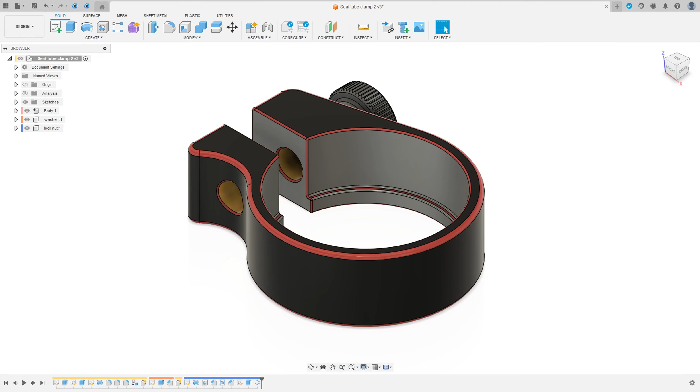Let me hide all this component here. Go to assembly, select new component. We call this nylon gasket.

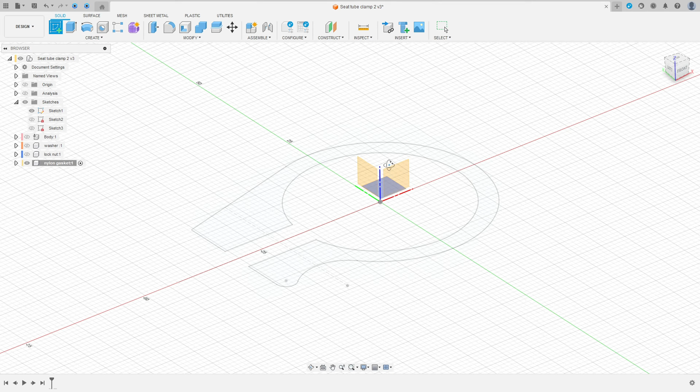Press OK. In the sketch here, show sketch one and go to create a sketch, select the top plane. Now go to create, select project, include project, select this point here, this arc and these two points, and press OK. We have this. We can hide sketch one.

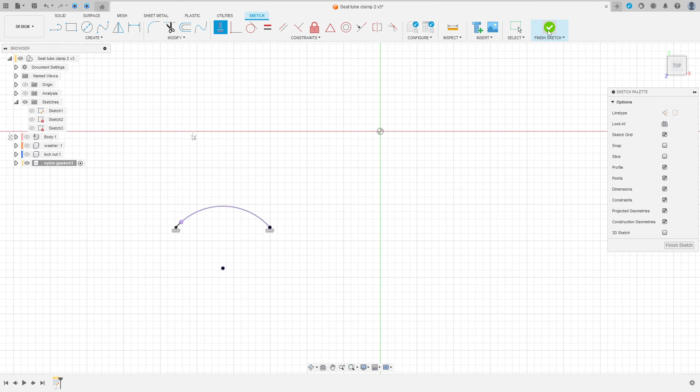We have this. Now go to create, select arc, center point arc, click here in this point and this point here, make an arc here. Now go to constraint, select horizontal vertical, click in this point and this point, and finish the sketch. We have this.

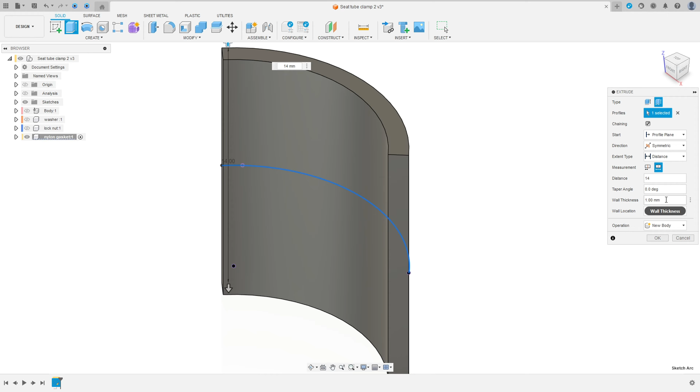Now go to extrude, select thin extrude type, select this profile here, direction symmetric, measurement whole length, distance 14 millimeters. Wall location side 1, wall thickness 1 millimeter. Operation new body, press OK.

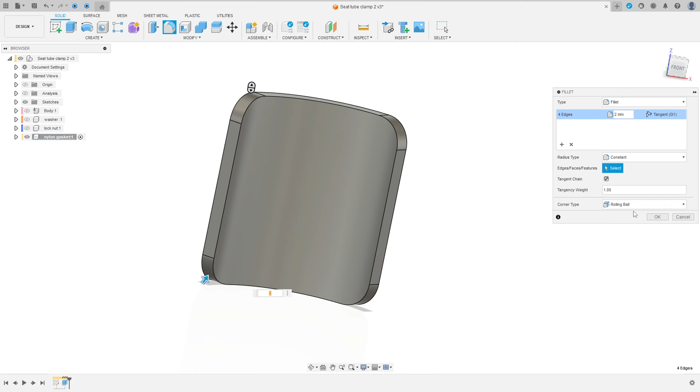We have this. Now go to fillet, select this edge here and this edge. The fillet here is 2 millimeters. We'll make this. Press OK. We have this.

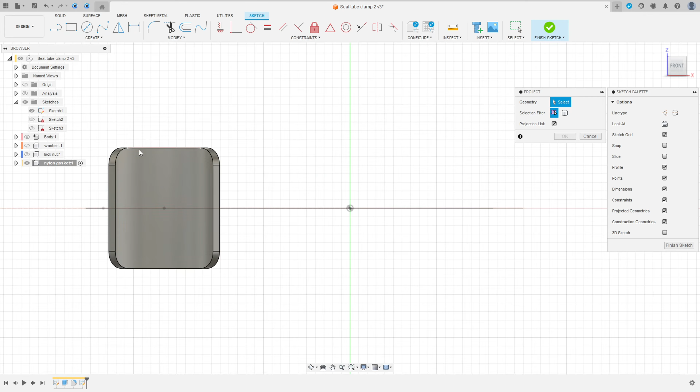Now show sketch one again. Go to create a sketch, select the front plane. Go to create, select project, include project, select this point here, and press OK.

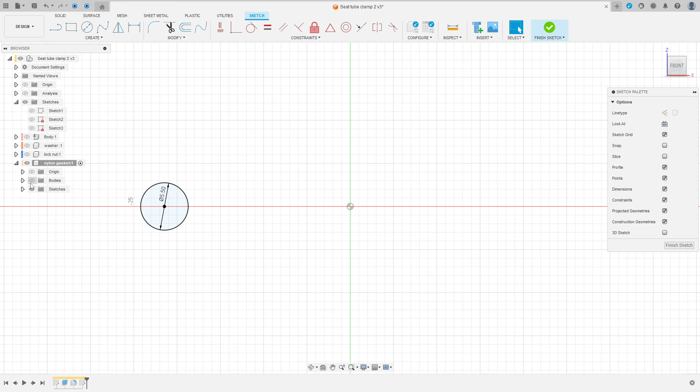Now we can hide sketch one and hide this body here. Select the circle, click here, make a circle with 5.5 millimeters of diameter and press OK. Finish the sketch. Go to extrude.

The operation here will be cut. Make a cut here to this side and press OK. We have this. Now to finish this part, select fillet.

Select this face here and this face here. The fillet here is 0.1 millimeters. Press OK. We have this.

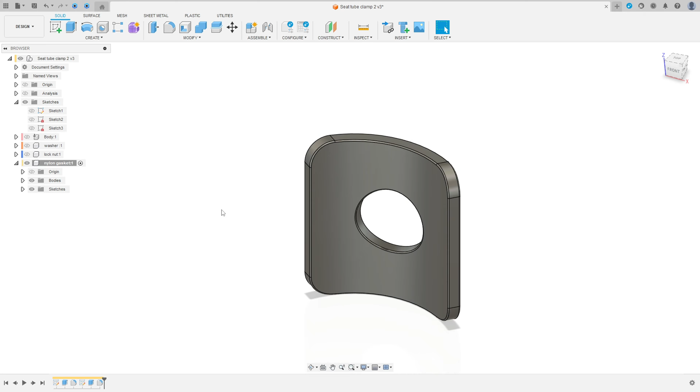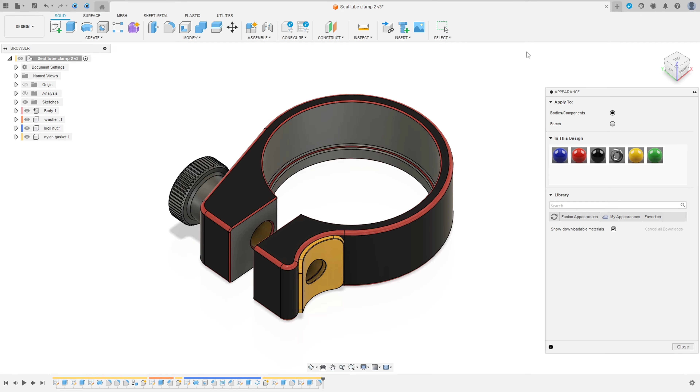Let me show the other component here. Let me activate this. We have this. Let me add a color here. Press letter A on the keyboard. We make this. That's good.

Now go to assembly, select new component. We call this aluminum wrench. Press OK. Let me hide this component here.

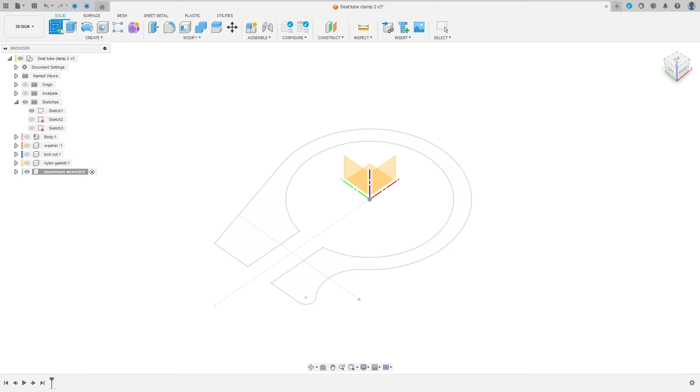First, show sketch one here. Go to create a sketch, select the top plane. Go to create, select project, include project, select this point here and this line, and press OK.

Now select line, construction line. Make a construction line here. This line must be perpendicular to this line and coincident with this point here. So go to coincident, select this point, this line.

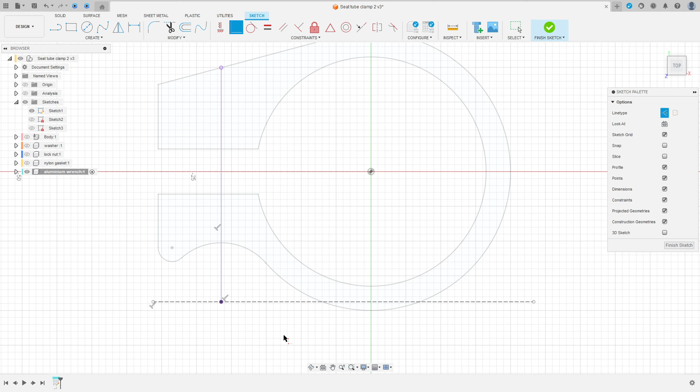Now select circle, click here in this point, make a circle here. Remove the construction line type here. This circle has 15 millimeters of diameter. And make another circle here with 2 millimeters of diameter.

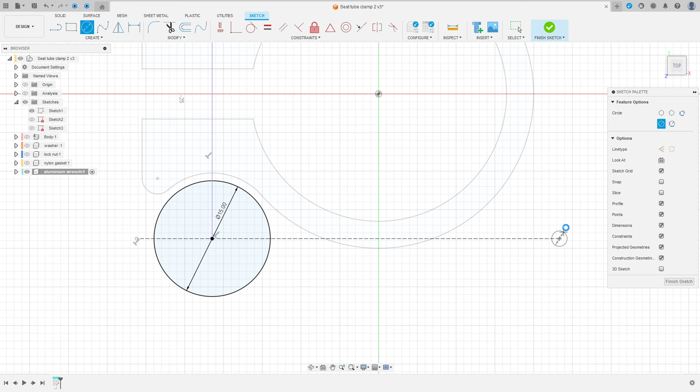Go to sketch dimension. The distance between these two circles here is 63 millimeters. You can move this a little bit here. We have this.

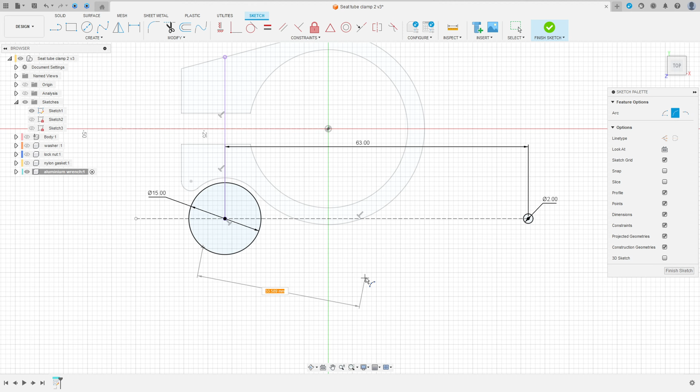Now go to create, select arc, 3-point arc. Click here and this point here, make an arc here, and create another arc here, and create another arc here. This arc must be tangent with both arcs here.

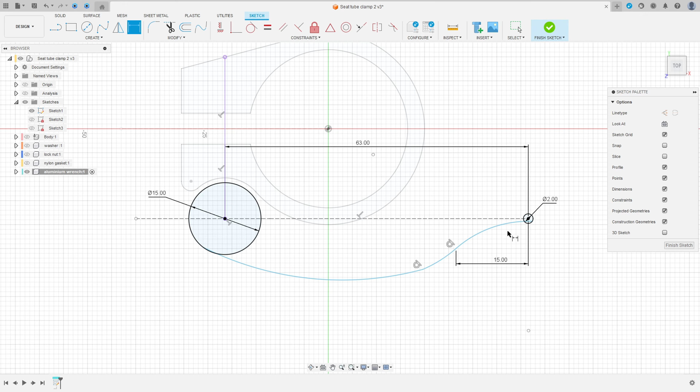Go to sketch dimension. The distance between this point here and the center of this circle is 15 millimeters. Go to constraint, select tangent, make this line tangent with this circle.

Now the distance of this point here, go to sketch dimension. The distance between this point here and this construction line is 4.7 millimeters. And the distance between this point here and this construction line is 8.5 millimeters. We have this.

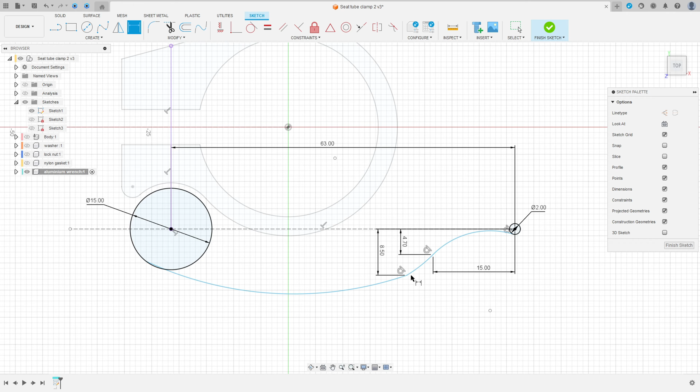Go to sketch dimension again. The distance between this point here and this point here is 42 millimeters. That's great.

Go to constraints, select this arc here and this circle, make this tangent. Now select line, construction line, select this point here and this point here. The angle between these two lines is 23.6 degrees.

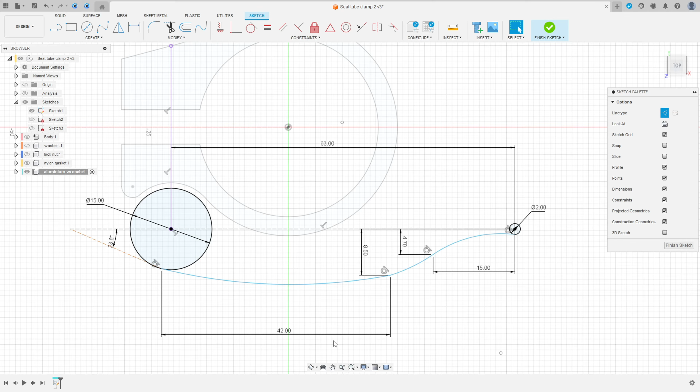Sorry, the distance here, let me delete this. Go to sketch dimension. The distance between this point here and this point here is 15 millimeters.

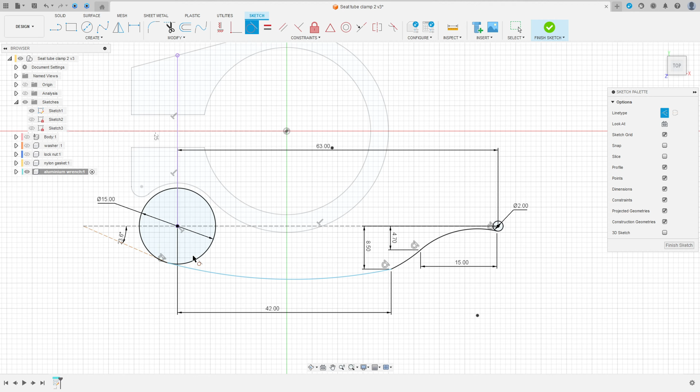And here, delete this distance here. Go to sketch dimension. The distance between the center here and this point here is 42 millimeters. And here, go to constraint, select tangent, make this arc tangent with this line here. We have this. That's good.

We can hide sketch one here. Let me remove this here. Now go to create, select arc, 3-point arc.

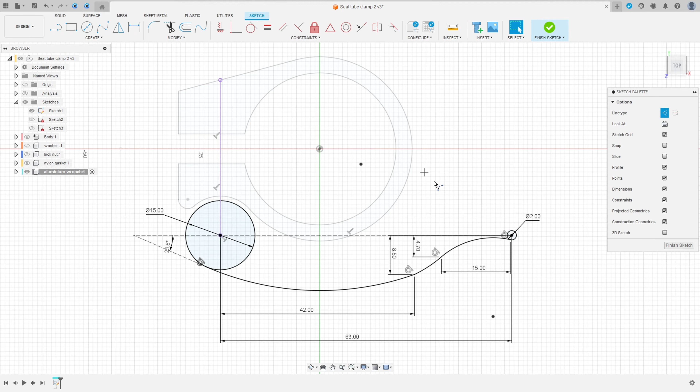Click here in this point and this circle here. Make an arc here. Remove the construction line type and create another arc here. And create another arc here.

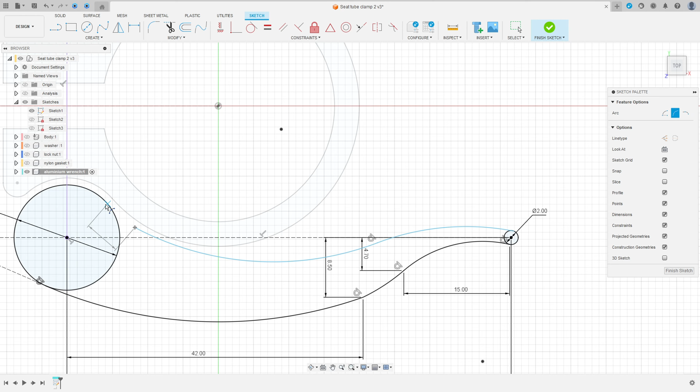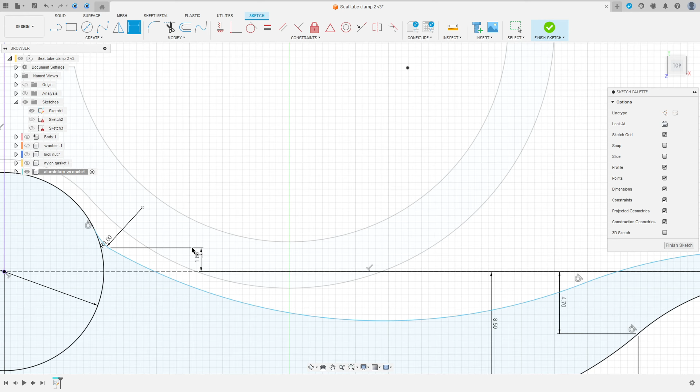Go to sketch dimension. This arc has 4 millimeters of radius. The distance between this line here, this point here, and this construction line is 1.8 millimeters. This arc here has 16 millimeters of radius.

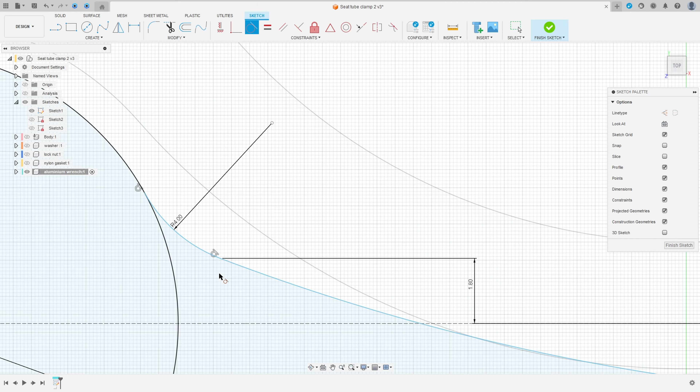Go to constraint, select tangent, make this line tangent with this circle here. And here, make this arc tangent with this arc here. We have this. And here, finish the sketch.

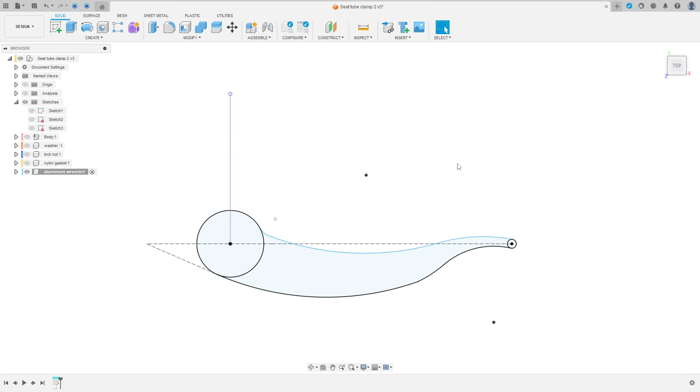Go to extrude, select this profile here. The direction is symmetric, measurement whole length, and the distance here is 14 millimeters. Press OK. We have this.

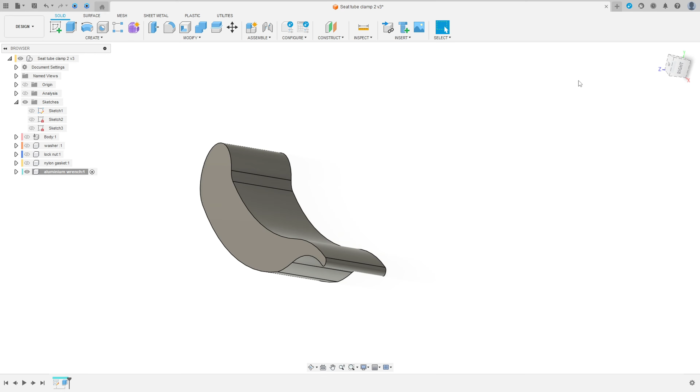Now go to create a sketch again, select the top plane. Show sketch one. Go to create project, include project. Select this line here and select this point. Press OK.

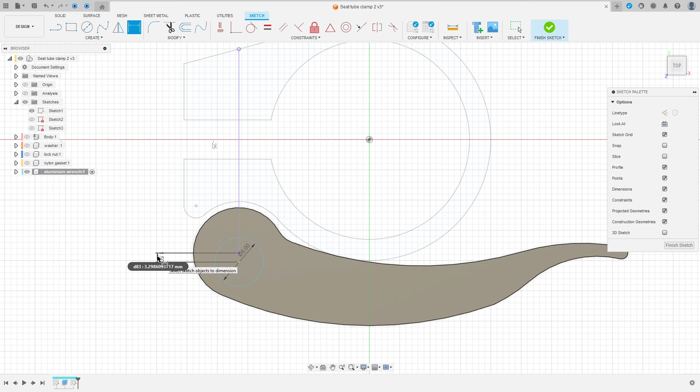Now select this circle. Make a circle here with 8 millimeters of diameter. Go to sketch dimension. The distance between this circle and the midpoint here is 1.5 millimeter. And go to constraint, select horizontal vertical, click in this point and this point here. We have this.

Now go to create, select the project, include project, select this arc here, this arc, and select this arc here and this arc, press OK.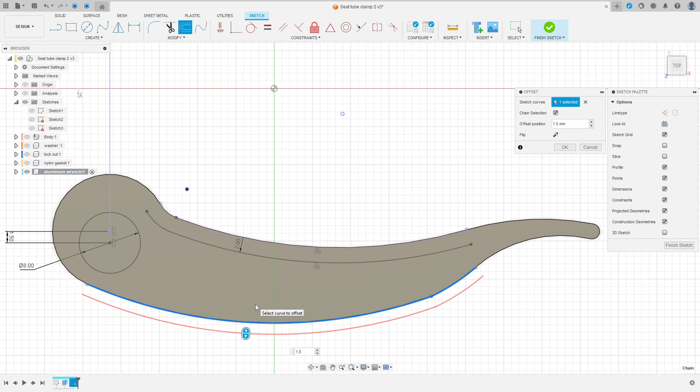Go to offset, select this line here. The offset here is 2 millimeters. And go to offset again, select this edge here. The offset here is 1.5 millimeters. Let's change the side, press OK.

We have this, OK. Select line, click here, make a line here between these 2 points here. Go to sketch dimension, the angle between these 2 lines here is 15 degrees. And the distance between this line here and the midpoint here is 10 millimeters.

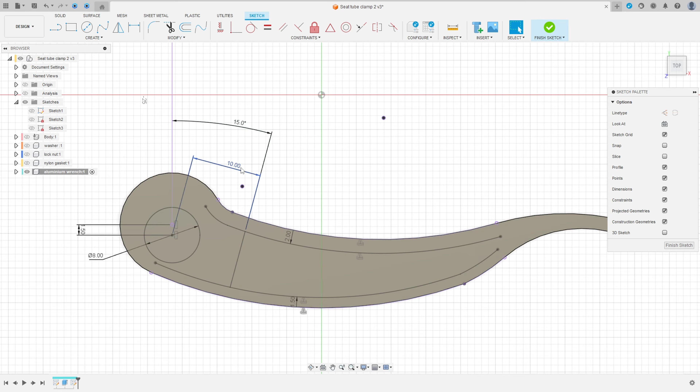The distance here, okay. We have this. Go to create, select arc, 3-point arc, click here in this point, make an arc here. Tangent with this line here.

Go to trim, cut here, and cut here. Go to constraint, select tangent, make this arc tangent with this line. Move this.

He changed the reference, lost the reference, but no problem. What you're gonna do is sketch dimension, select this arc, this point here, 2 millimeters, and this arc, this point here, 1.5 millimeters.

Go to constraint, select horizontal vertical, click here in this point and click in this point here. Okay, we have this.

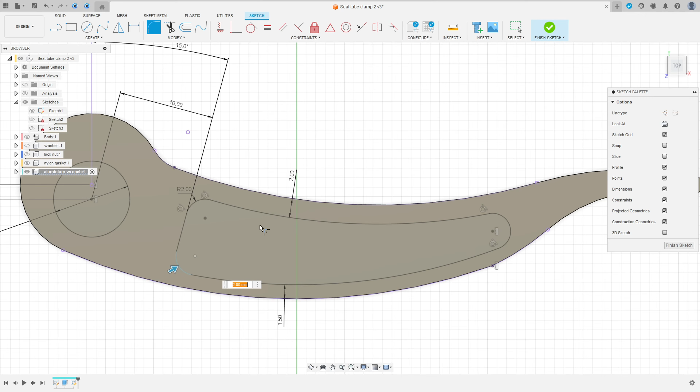Go to modify, select trim, cut here, and cut here. Go to fillet, select this point here, the fillet 2 millimeters, and this fillet here 2 millimeters. Press OK. We have this, okay.

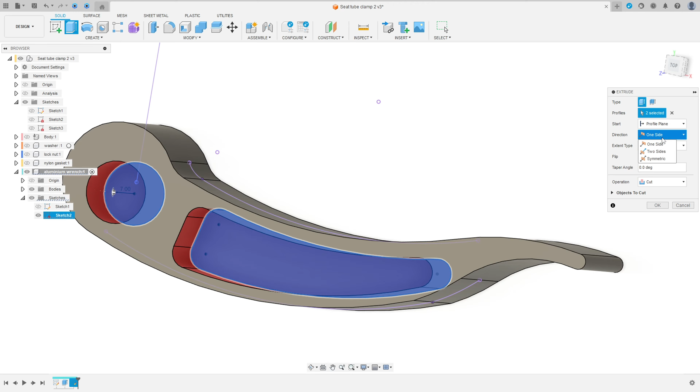Now go to finish sketch, go to extrude, select this profile. Let me hide this body here. Okay. The operation here is cut the extent type, all symmetric, and press OK. We made this, okay.

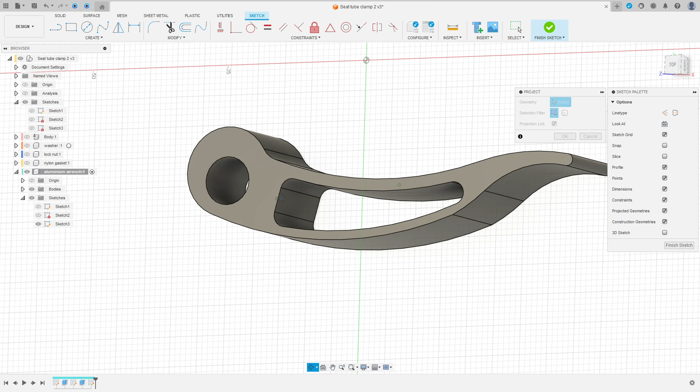Now go to create a sketch, select the top plane, go to create, select the project, include project, select this face here, press OK.

Now select a line, make a line here. Let me delete this. Go to constraint, select parallel, select this line here and this line, okay.

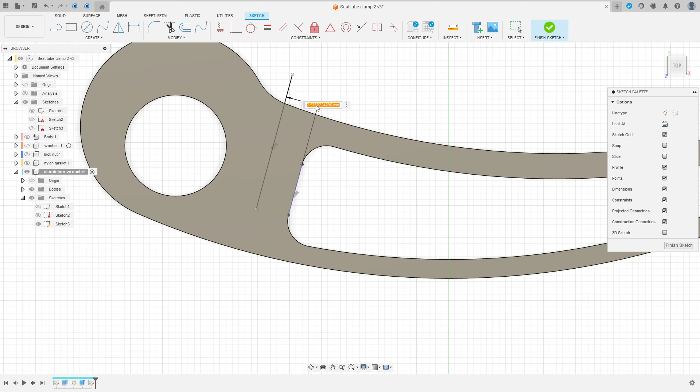Dimension, 3 millimeters of distance. Okay, we have this. We can drag this a little bit.

Go to smart dimension here, 20 millimeters. But we can be 30 millimeters, okay? No problem. That's okay. Now make a

square here because we use this to make a cut here, okay? So no problem. You can put the dimensions here. Finish the sketch.

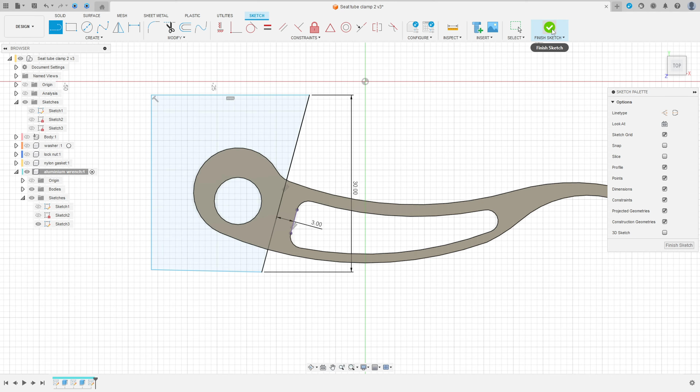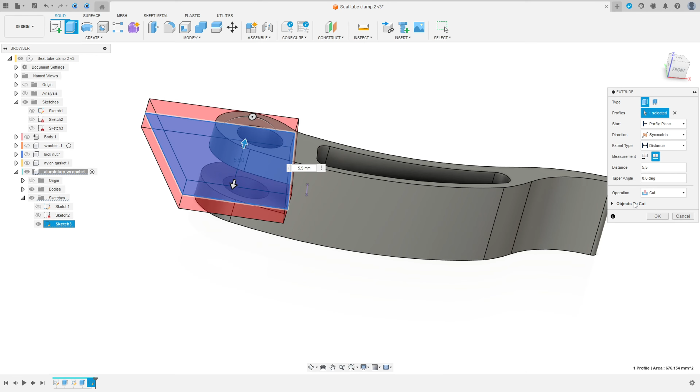Go to extrude, select this profile here. The operation here will be cut. The direction here is symmetric, extent type, distance, measurement, whole length, and the distance here is 5.5 millimeters. Operation cut, press OK. We made this, okay.

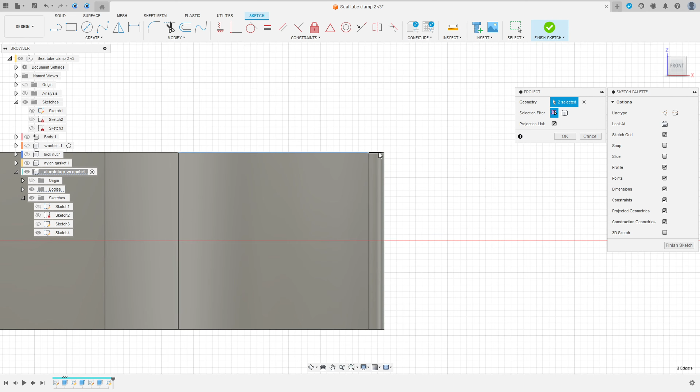Now go to create a sketch and select the front plane. That's okay. Go to create, select the project, include project, select this edge here and this edge here. Select this edge here and this edge here.

And press OK. We can hide this body here. We have this two line here, okay?

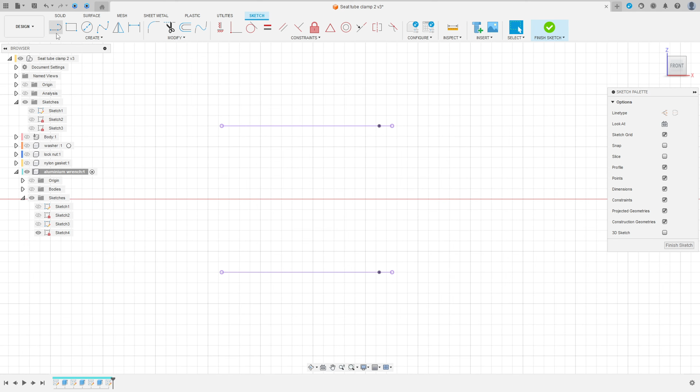Now select the line, make a line here between these 2 points and go to create, select the arc, 3-point arc, click here in this line, make an arc here and make another arc here, okay?

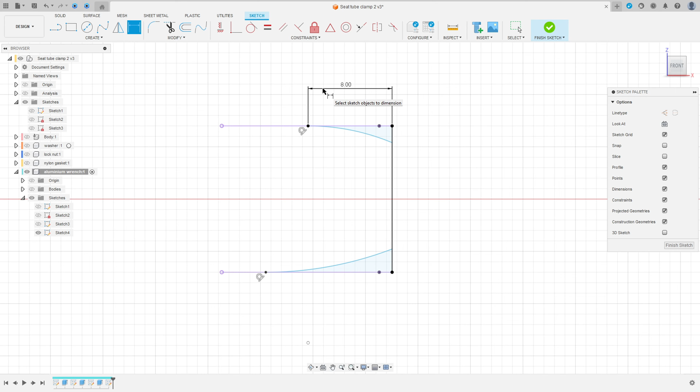Okay, go to sketch dimension. The distance between this point here and this point here is 8 millimeters. And the radius here is 15 millimeters of radius.

Make the same here, 15 millimeters of radius. And the distance here, 8 millimeters. Okay, we have this. Now finish the sketch, show the body here.

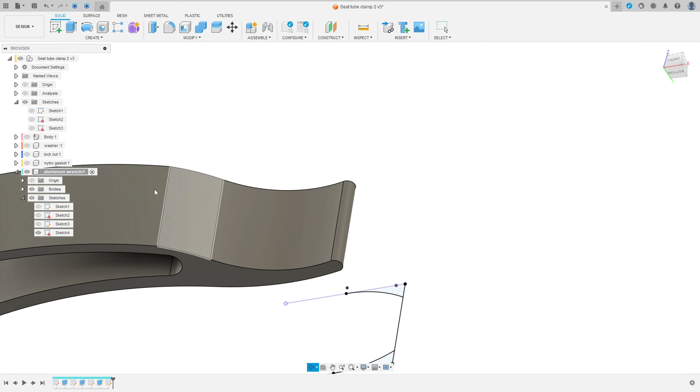Go to extrude, select this two profile here. And we'll make a cut here, okay? So here the distance to object, select this object here, adjacent face, operation cut, press OK. We have this, okay.

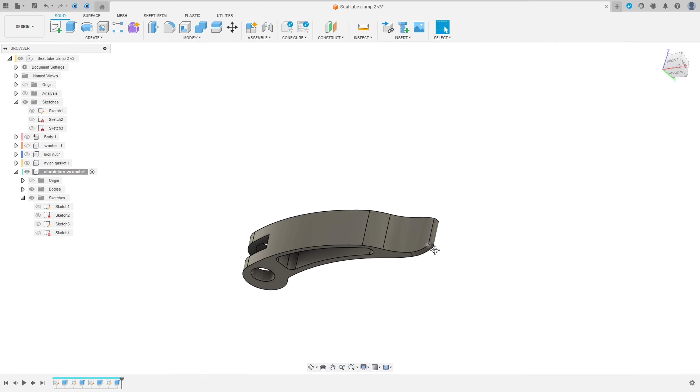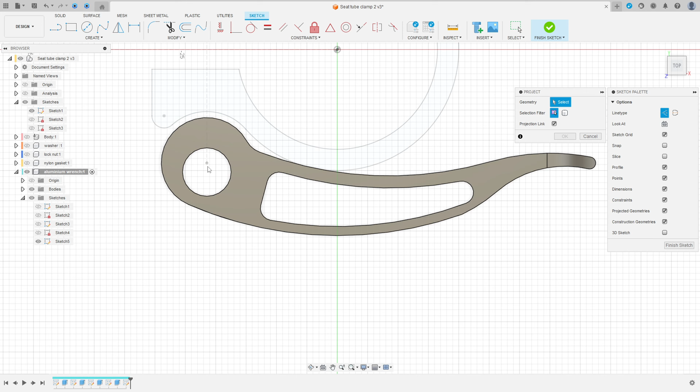Now go to create a sketch, select the top plane again. Select line, construction line. We can use this point here, sorry, go to create project, include project, show this, use this point here, press OK.

Select line, construction line, click here in this point, make a construction line here. Make sure that it is a horizontal line, okay.

Now select 2-point rectangle, remove the construction line type, make a rectangle here. You can delete these constraints.

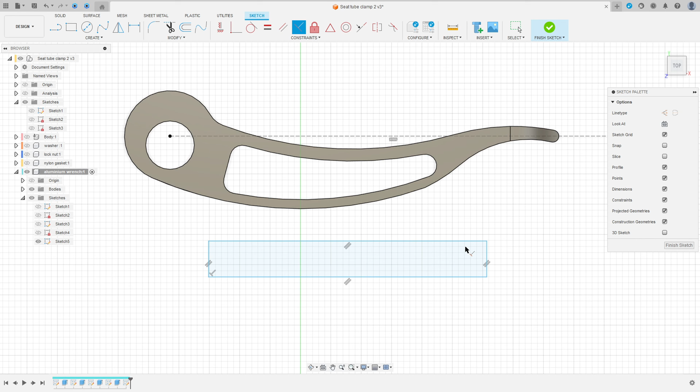Okay, make this parallel, this two line here and this two line here. Okay, and make this line perpendicular. Okay, move this a little bit here. Move this line here a little bit.

Go to Smart Dimension. The angle between these two lines here is 80 degrees. Okay. The distance between these 2 points here is 15 millimeters. The distance here, sorry, is not the distance, is the length line,

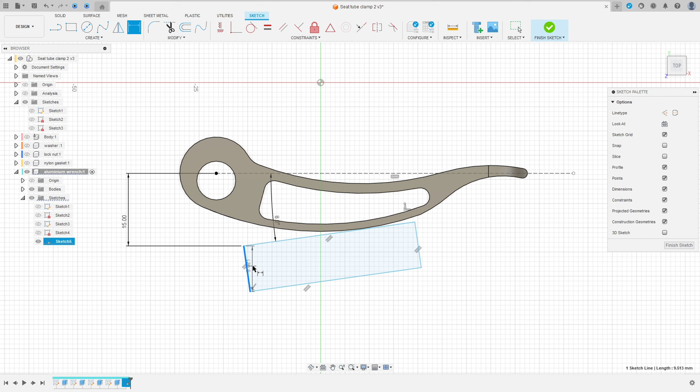is 4 millimeters. And this length here is 15 millimeters. Okay, we have this.

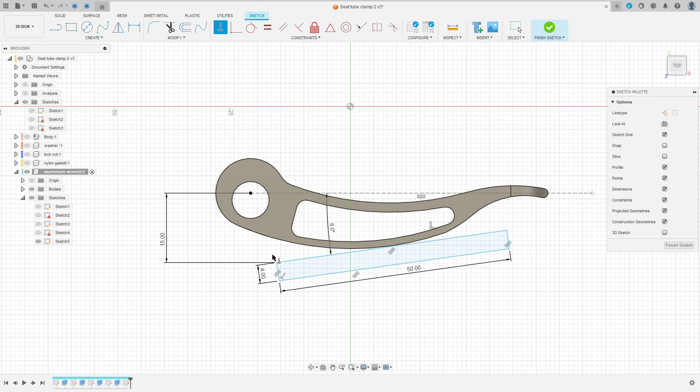Now go to constraint, select vertical, horizontal, click in this point here and this point here. We have this, okay. Now finish the sketch.

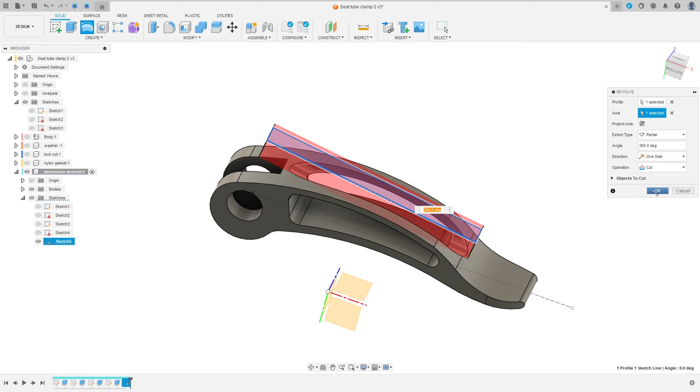We have this. Go to create, select revolve. The profile with this profile, the axis is this axis here. We'll make the operation cut here, 360 degrees. Press OK. We made this, okay.

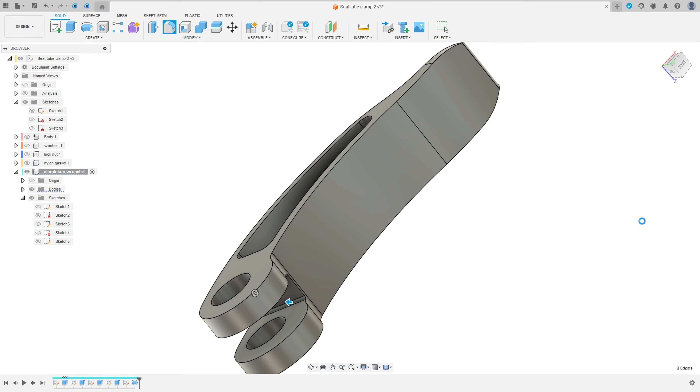Nice. Go to fillet. Select this edge here and this edge here. The fillet here is 0.5 millimeters. Press OK. Now select fillet again.

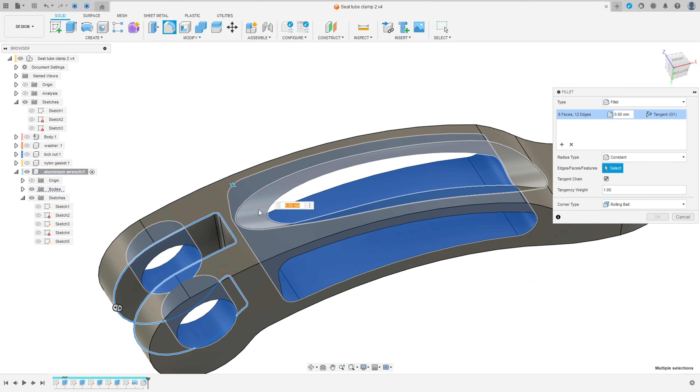Select this face here. This face, no. Let me remove this. Select this edge here. The two circle here inside. This face here. And this face here. The fillet here is 0.3 millimeters. Press OK. We have this, okay.

And now to finish this, select fillet again. Select this edge here and this edge here. The fillet here is 0.5 millimeters. press OK. Here we finish our exercise.